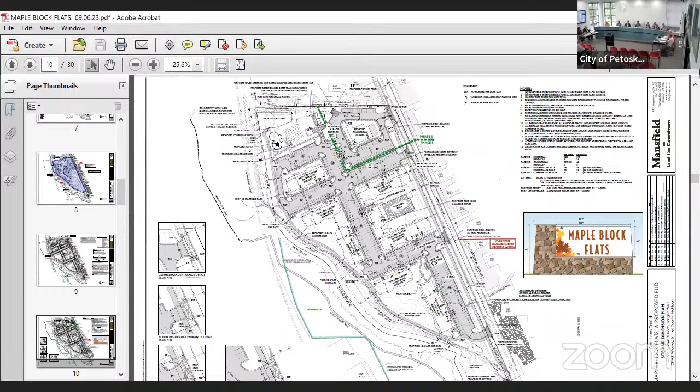Because construction is fairly close to the river, we want a line of two silt fences. We're recommending removal of 6 parking spaces adjacent to 2 curb cuts, to reduce conflict between people turning in and people backing out. Even with the reduction of those 6 spaces, they still meet the parking required under the ordinance.

Prior to issuance of a zoning permit, the developer will provide 2 easements: one for a 10-foot shared pathway along Standish Avenue, and another on the south portion of the property adjacent to Riverside Park. That could be used in the future as part of an extension of the Bear River Recreation Area and a pedestrian bridge, allowing residents to cross the river into the park without using the road. So those are the 10 conditions based on the technical site plan review.

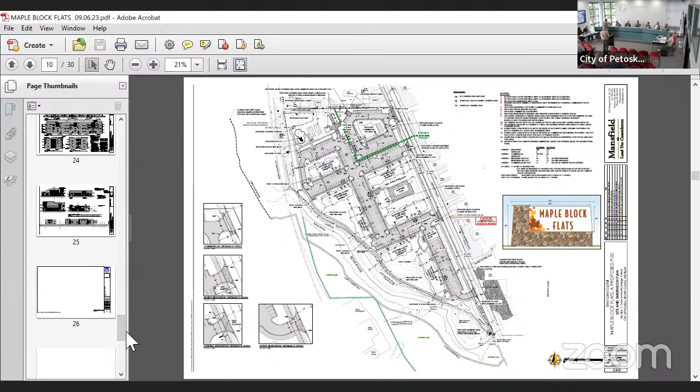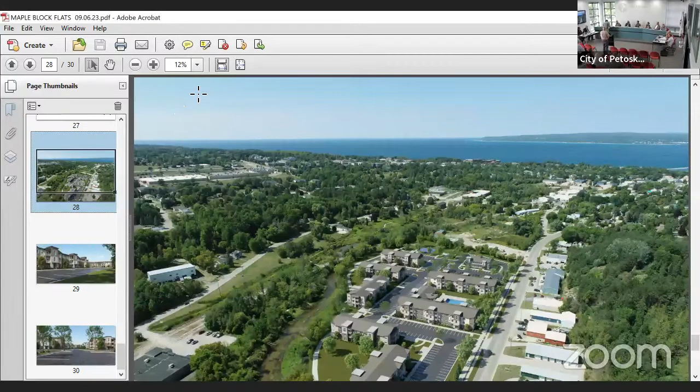So we have a recent drone flight done of the site, incorporated the plan with the full CAD drawings, all gone vertical. Now you can start to see the shade, the shadow in a realistic form, the scale of development against the adjacent uses and the landscape, and get a clearer picture.

But we think we've arrived at a fairly efficient yet pleasing design, aesthetically characteristic of the area, and we placed different roof lines and pitches. So this is the actual product we're proposing. This is about as photorealistic as possible.

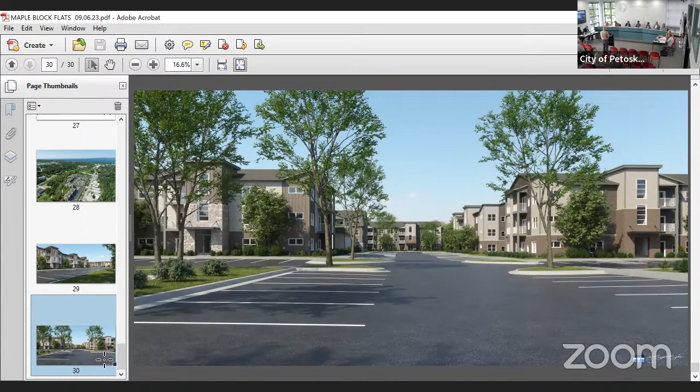I'm not seeing the exact thing, but would this be the color? It's the browner color. Yeah, this one. Maybe the... The material that she's holding, that's the manufacturer and the context of the material, that stone. My apologies if they don't exactly match the brochure. Yeah, no, it's different. Maybe this one's closer. But it isn't the same. All right, but this is the manufacturer, and then you're doing...

The almond or the mist gray? For the color, for this part of it. It's the darker taupe tone at the top. On the right, this one? Yeah, oh all right, that's on the batten, and then the lighter color is the horizontal. So when you mean lighter color, right here, in this area, you have... okay. And then dark, so is that a mist gray or wheat?

Okay, so when you look at this, it's LP walnut and LP sand. If you could pass them, I don't want to spend a lot of time on this. I think they're illustrating that those are the products they're using. So if you have any opinion, you can share it.

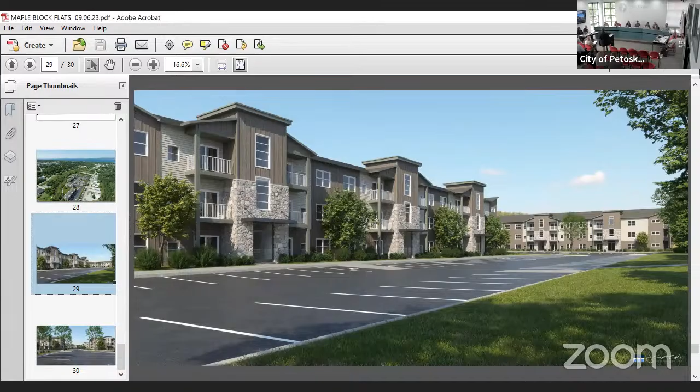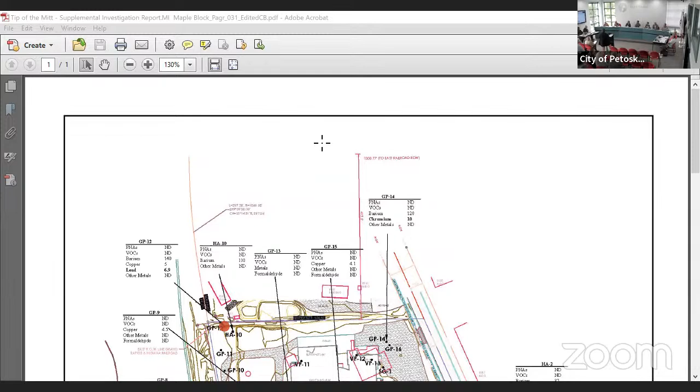Lisa, do you mind pulling up the map that I sent you earlier? Oh, sorry, it was up there and I didn't realize it switched, sorry. Okay, so this is page 31 of the investigative report.

And if you'll notice, those two blue dots are where the groundwater samples were taken. One of them is under the existing parking lot, and the other one doesn't look like it was in the main manufacturing part of the existing facility.

And the existing soil boring samples that were taken were designed to inform the soil vapor intrusion issues for the existing buildings, right? As you mentioned earlier, the south part of that site - where admittedly the phase 1 environmental assessment, which was determining the historical use of the site, said stuff probably wasn't dumped down there - testing hasn't happened down there, and there's a general idea to pass stormwater through that part of the site when that part of the site hasn't been sampled.

The places where there are sort of hot spots, those red parts, are on the river side and behind the building where dumping - this is an allegation that I believe is true, but I'm not going to say it is - I believe the dumping was primarily happening behind the building, not in the parking lot. And even if it was, the parking lot is probably protecting that soil.

And so if you're taking groundwater samples sort of upriver of your hot spots and you're saying it's fine, that doesn't seem like I have enough information to say that it is. And it may be okay, but I don't have the information to feel comfortable about it.

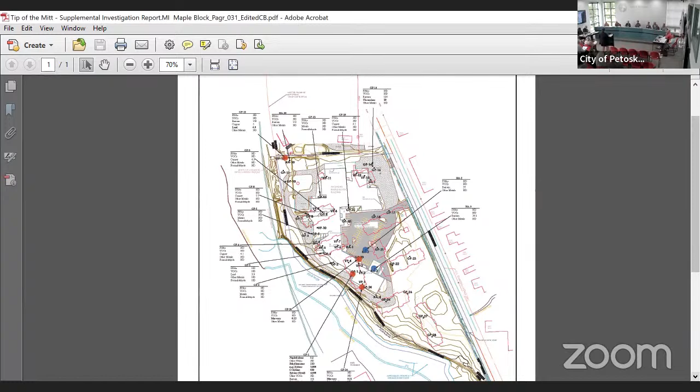I know the staff people working on this have your best interests at heart, and nobody wants to do the wrong thing. I am not saying any of that. I just want to say that it does, to some extent, fall on planning commissions and city councils to impose those stricter than baseline requirements. And it's your decision if you want to do so.

If I could, just to echo — a reminder that Bay Harbor had all the permits, the DEQ signed off, the city staff was okay. No one, these weren't bad people. But things fell through and it wasn't done right.

So could that ever happen is the question. And I'm not going to say that it is going to happen, because again, this is not Bay Harbor — this is lower levels of contamination. But I just...

In reading about brownfield soil management and stormwater management, the best management techniques or best case principles were to encapsulate the soil, remove the soil, or if you're not going to remove it entirely, add a collection line and keep a close eye on it to make sure you aren't inadvertently causing problems.

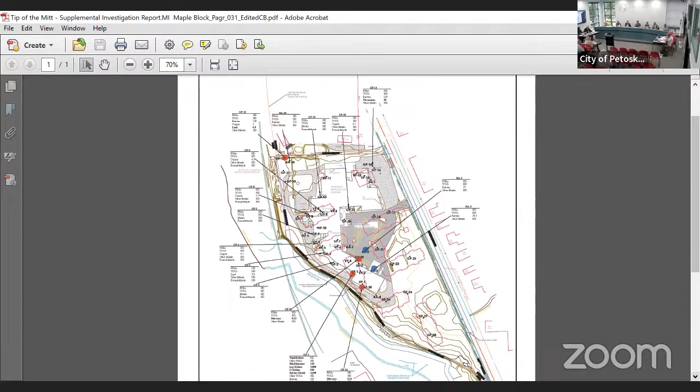Are there any comments about the C15 civil detail, sanitary, civil detail storm? I think that they've covered it pretty well and they're assuring us they're going to get the right size for things.

Then we go to C2.0 existing conditions. Any questions or comments on that?

The demolition plan, soil erosion sedimentation control plan.

So on the soil erosion and sedimentation control plan, they make a note along the river that installs silt fence around the perimeter of the site. That's where the double filter fence will go. Okay.

On the site and dimension plan, you have the signage shown, but we won't be approving that sign tonight. That needs to go through the normal sign permitting process. And then the proposed fire hydrant is in the southeast corner of the building.

Yeah, that is correct, at the building. I did clarify with Jason Fate on exactly where he wanted that. Jason Fate, the city engineer. Okay, through DPW. Yep, well, I don't think that will impact tonight.

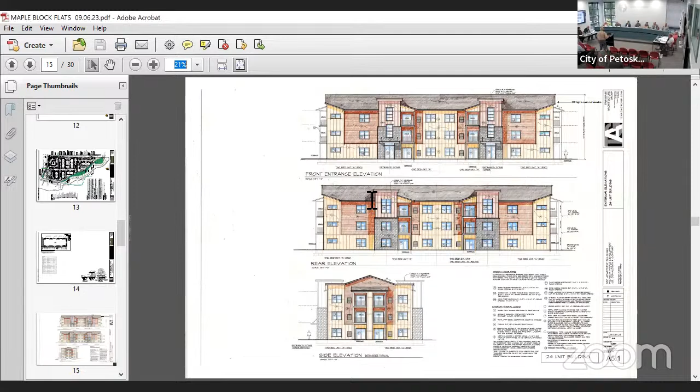Okay, that's a fair answer. Thank you, I can see that. All right, any other comments on that section of plans?

I just wanted to say that I appreciate the photorealistic renderings that you put together for us. That really helped. All right, and we're finally down to the photometric.

Before you go there, just a quick question. I didn't really see it in here, and I'm assuming it's all in accordance with building code and so forth, but for fire mitigation, I'm assuming each of these units is going to have a full sprinkler system. And the division between the units, is that indicated by the darkest lines on the floor plan?

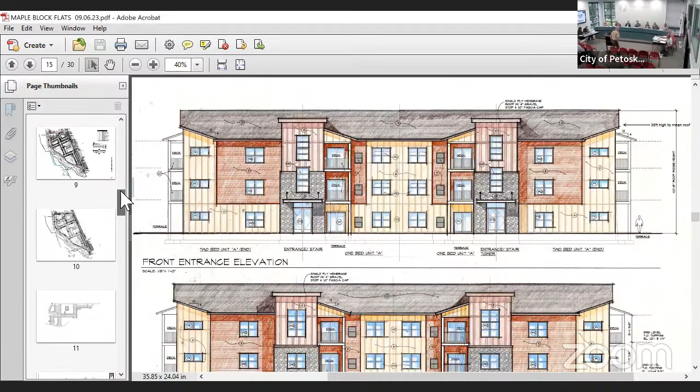Have to look at it. Which plan number are you looking at? I'm just looking at a typical floor plan, these quadrants. Okay, so it's the heavy lines that show the firewalls. It's only, I think, a 1 hour wall, but it is a firewall. Only a 1 hour wall is required because it's suppressed. Yeah, so many rules go away when it's suppressed.

Okay, thank you. All right, anything on the photometric lighting? Yeah, I have a question there also. When you look at that kind of 3D visualization of the photometrics...

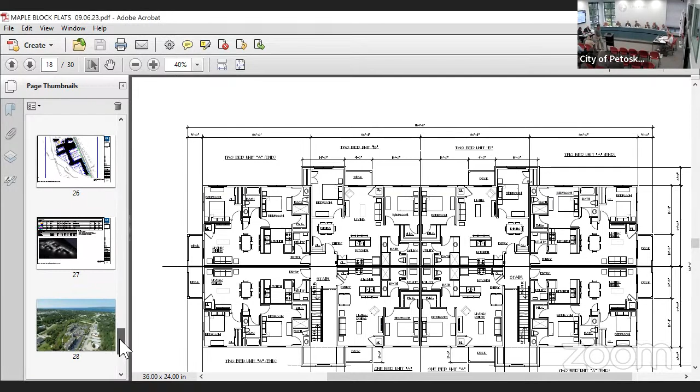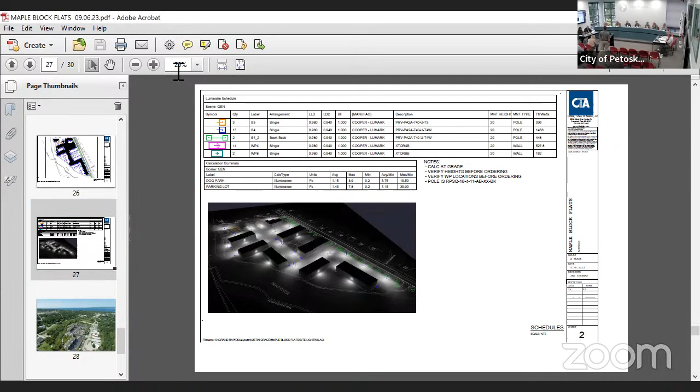So we're looking at sheet two. Correct, sheet 2. I was wondering why there isn't a light maybe at each entrance rather than one in the center of each side of each building. It just struck me that especially with the longer buildings, it would help at the center entrance, but there really wouldn't be light at the two end entrances. So I wondered if there shouldn't be some kind of light at each entrance.

Yeah, so we have the lights, the wall pack type lights. Hi, Chris Wickline, JB Donaldson, 37610 Farmington Hills, Michigan. The lights are at the photometric shows kind of where some of the buildings have 2 entrances or 3 entrances, depending on the size of the building. Currently those are meant to light the parking lot.

There would be other lights at people's patios and stuff like that, that would just not be part of that, but that's where they would get that light. So the lights showing up on this image then are not at the entrances, or you're saying those are meant to try to throw light out to the parking areas?

Correct, those are wall packs. Well, would there also be lighting that doesn't show on this image that would be at each entrance?

Potentially, so you're going to have a corridor with a glass door on it, and the entryways will be lit. You'll see through that glass door into the interior lighting. So you're saying only at the entrances, it will be interior lighting that lights things up at the entrance? Correct, the glass is around the door, to the side of it. The door into the entryway wouldn't be a solid door, you'd be able to see into it.

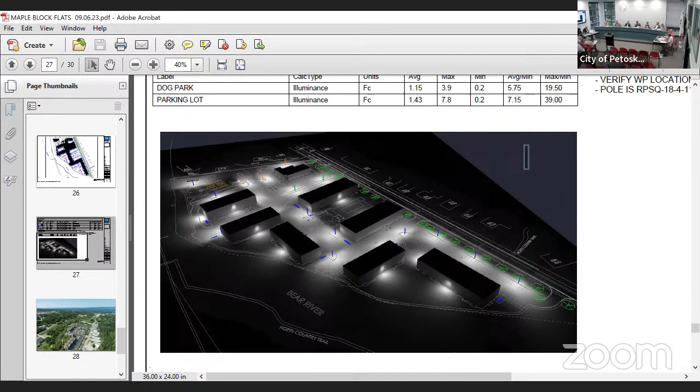We made some adjustments in order to put the fire lane back there, recognizing that it was pretty close to the corner of that one building. But the rest of the buildings are fairly set back, except for building F, which is fairly close, and a little bit of the corner of building D. The other buildings are set back their distance amount from the top of the river, top of the bank.

For example, building F, there's possibly some room to move it a little bit to the east. Building D, possibly moving it a little bit to the north to reduce the corner distance. But we don't have much, there's not much room on the site to make significant adjustments.

You see what I'm talking about, Wayne? So to the developer, does that concern you about the floodplain area? Do you feel that should be addressed?

We're not impacting the floodplain area, the little part that comes in, and that wasn't identified as a wetland in that area. When we had a pre-application meeting, we noted that area, and you can see the depression when you're out there — it's basically an elevation-based thing. But no, what we've held to since day one is that fence line. If you're familiar with the property, there's a fence that goes along the river, and you're not crossing that fence. That's our east or westmost boundary that our grading limits are. The area that we're developing is the current used area.

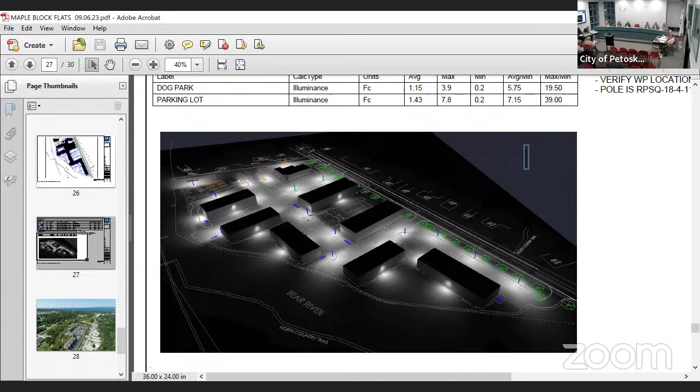Okay, building and accessory structures—we've discussed on-site circulation. Proximity of buildings, they're all pretty far away, so that's satisfied unless anybody has any concerns. Then we go on to ingress and egress, curb cut locations, but those all seem doable. We've discussed in the past the number of curb cuts, and I think it's settled on what they proposed.

They note that the riparian edge along the Bear River will be preserved and not disrupted as part of the project. We have a condition for them to refer to the landscape review performed by Tim Knutson for corrections on that. The lighting is satisfied. For natural and historic features, they're recommending a double filter fence to protect the Bear River.

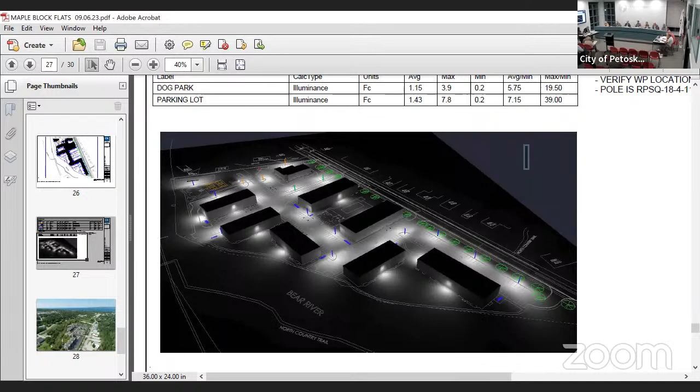Number 10, prior to issuance of a zoning permit, submit easement documents for review and approval from the city for the 10-foot easement along Standish Avenue, for the 10-foot wide shared path, and the area designated for pedestrian bridge connection to River Bend Park. Number 11, remove the existing sidewalk along Standish Avenue.

And number 12, submit to the city, prior to the second reading of the PUD rezoning, material and color boards for the apartment buildings for administrative review and approval.

Now, I want to go back to number 10 just for a quick second. Is it Riverside Park or is it River Bend Park? River Bend, sorry, River Bend. Thank you.

That's my motion. I have a question. Since they submitted the materials and color boards, does the city need to review it? Do we need number 12? No, we don't need number 12 since they submitted it. Please modify my motion to eliminate number 12.

Okay, you did want sign approval at a later date, right, if everyone's okay with that. And Lisa, what we've used language in the past about the sign approval having to come later. Do you remember what that language is? Subject to staff review and approval typically. Well, I think on this one, because it looks pretty large, that it probably should be taken up by the sign committee.